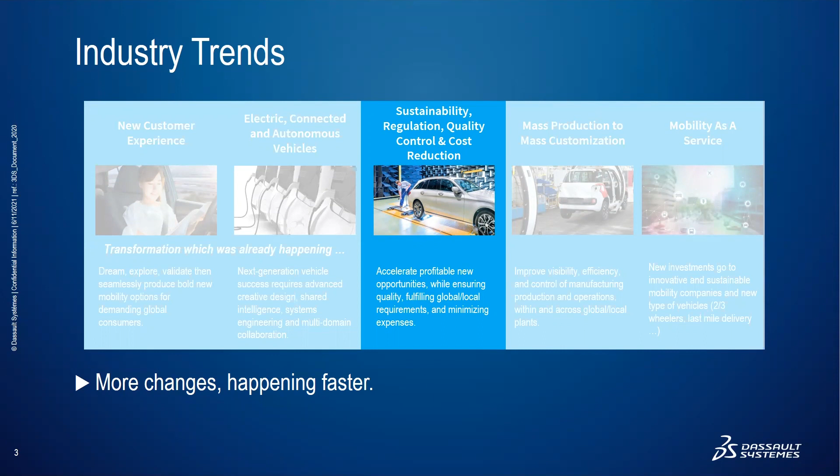It is therefore no surprise that when General Motors, in a press release, shared some of the testing statistics for their 2019 Chevrolet Silverado model, a staggering 7 million miles of testing were required by about 800 test vehicles. Yes, many of those vehicles are production vehicles and therefore less expensive than a prototype. But of course, this also means that they have to wait for the availability of those production vehicles before they can perform the test, at which stage a design change becomes an enormous cost.

All in all, they performed almost 500,000 physical tests. And this is just for one model in their product line.

Now, I would like to put this in context with a quote from Elon Musk, who said, 'Progress in any given technology is simply the number of iterations times the progress between iterations.' In fact, he probably tweeted it.

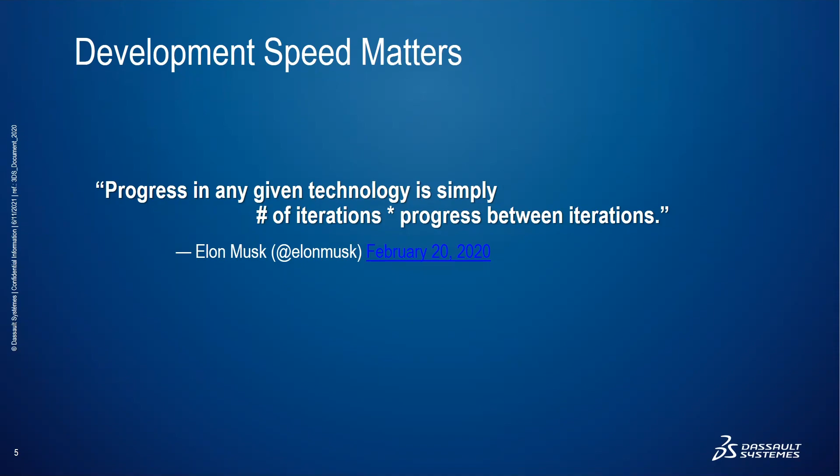I like this quote because it gives us essentially a measure for the innovativeness of an organization. When you want your company to become more innovative, you can, of course, invest in good coffee, beanbags, a ping pong table to improve the motivation and work environment of your engineers, and that will certainly help. I don't discourage that. But ultimately, you have to ask yourself, how fast can I iterate?

So here is an admittedly very simplified flowchart of an innovation process. The key is the loop in the center. The more often you go through it and the more you improve in every iteration, the better your product will be. And this is the reason that GM reports about 500,000 tests for a single model.

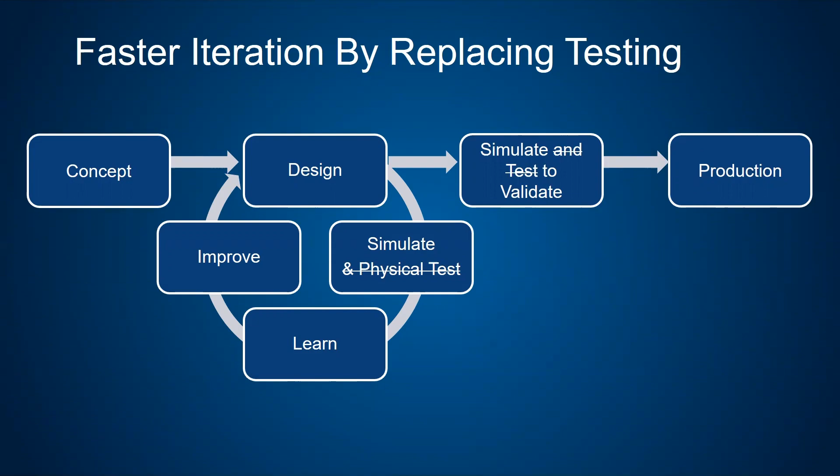It becomes also clear that the bottleneck in this loop are those physical tests. Physical tests are expensive, and there is certainly a high pressure to reduce this cost. But in this presentation, I would like to focus on the fact that they're also very time consuming, and therefore they slow down the innovation process.

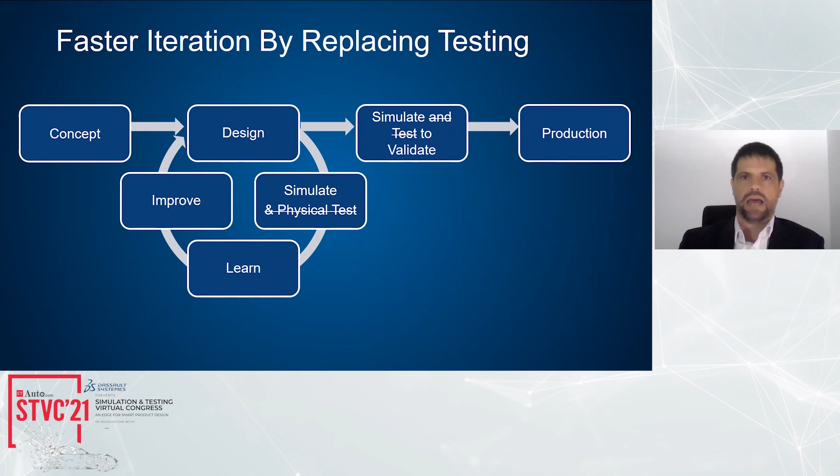It will not surprise you that from Simulia, the answer to this is, well, just replace all physical tests with simulation.

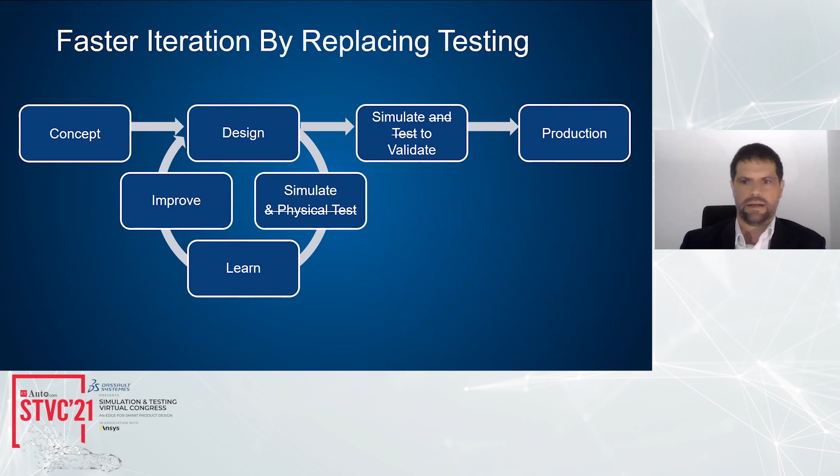When we suggest this to our customers, almost always the first question is, how accurate, how predictive are those simulations? And this is certainly a valid question. If the simulation gives you different answers from the test, obviously you cannot replace one with the other. However, today this is largely under control through a rigorous deployment process with clear KPIs that measure the predictiveness of the simulation.

The next concern is maybe best exemplified by this objection that we heard from one executive a couple of years ago. He said, 'I can build a prototype faster than you can build a simulation model.' Well, if this is true, then by shifting from test to simulation, we are simply replacing one bottleneck with a different bottleneck, and we have very little impact on the speed of our innovation.

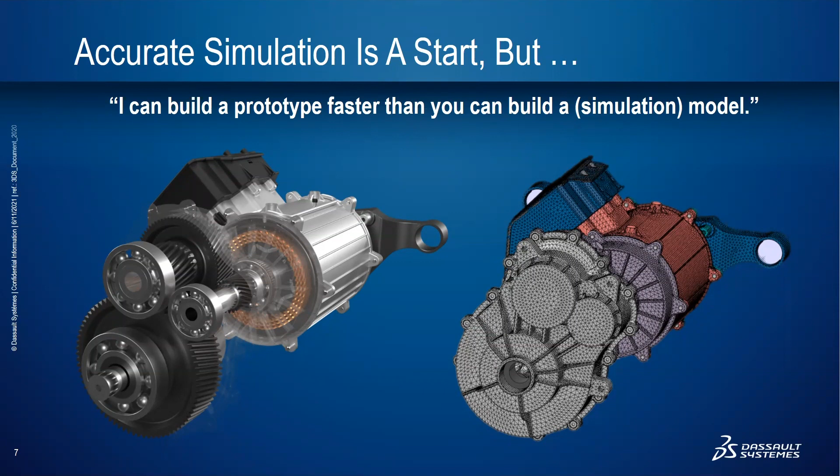This also highlights that within the CAE process, the bottleneck is the model build. This is where ModSim comes in. ModSim fixes that.

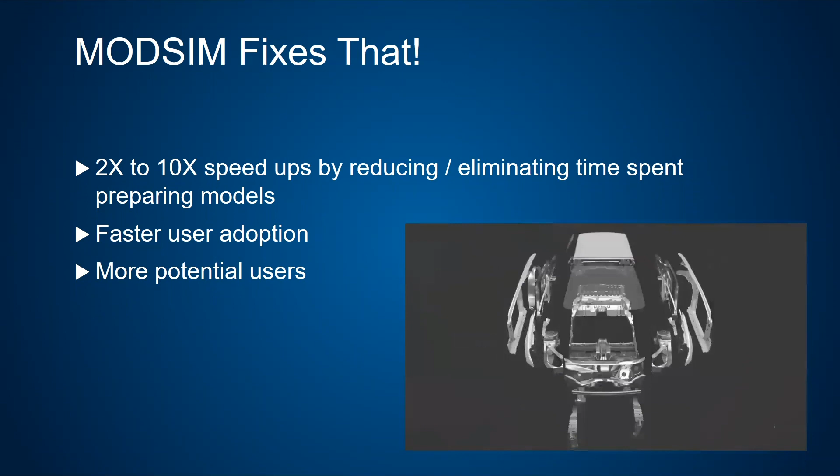Where we have deployed our model build process on the 3D Experience platform, we have measured 2 to 10 times speed up for every single process compared to what was previously deployed.

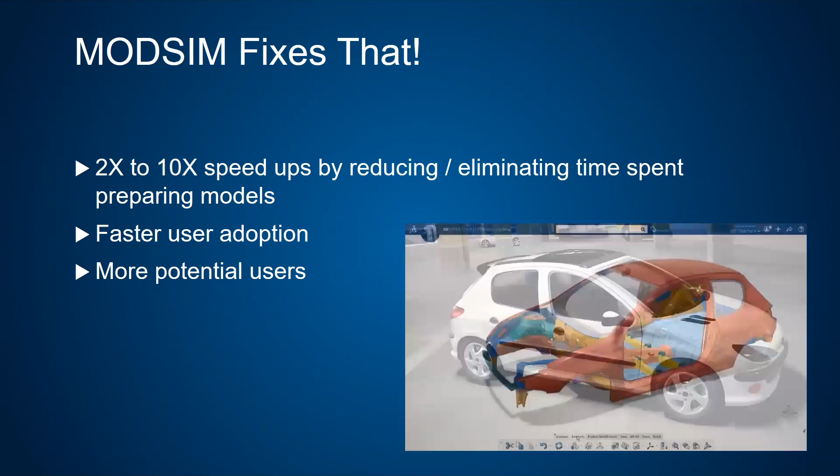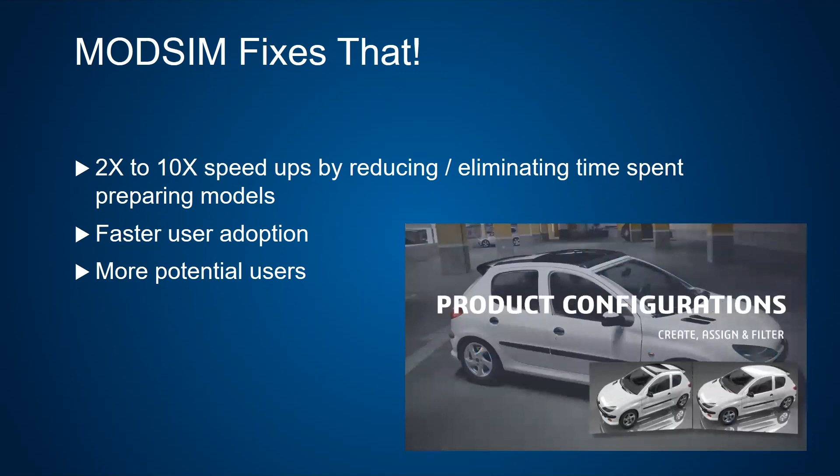In addition to speeding up the iteration cycle, this also had other positive effects on innovation, as it makes simulation more accessible to more users, to designers, which also addresses another concern: what do all these model build experts do that we have today building our models?

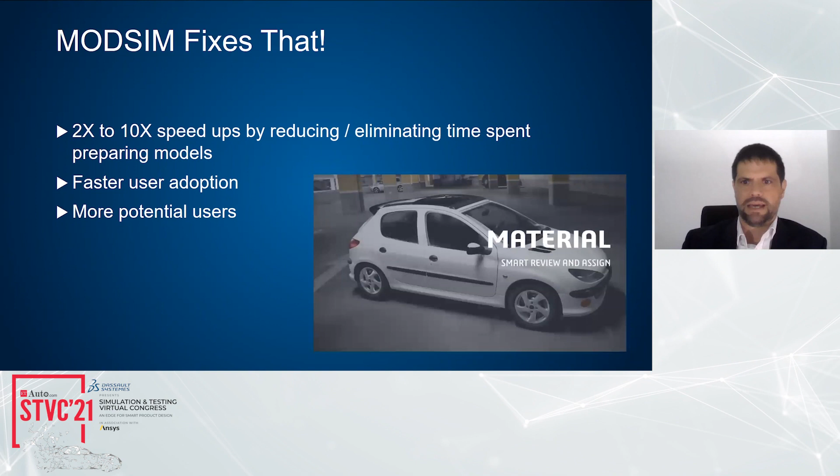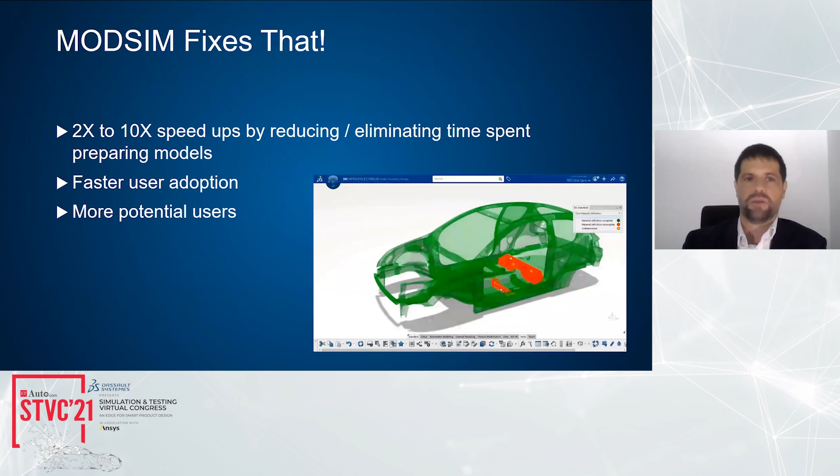What we have seen at companies that have deployed ModSim, that have deployed more efficient modeling processes, is that they have not reduced their workforce, but instead they build more models. It turns out that innovation is more valuable than cost reduction.

So to understand this kind of efficiency gain and how it is possible, let us look at a CAE process, a typical CAE process as it is probably deployed in a similar form at your organization.

So we go from a design on the left, where we have a CAD database managed by a PLM solution and a fastener database, stored on a network drive. In order to prepare a model, the CAD and the fasteners have to be imported into the preprocessor, which does automated CAD mid-surfacing, meshing, some connection definition, largely done by scripting, and then integrates and assembles the whole model. Again, this is stored on a network drive.

Then we have the CAE authoring solution, which sets up the simulation. Normally there are different use cases, maybe for safety, NVH, and durability, and the results are stored on a network drive and loaded into a CAE post-processor. In the meantime, you probably also have an orphan mesh from one of your suppliers, which needs a different process of integrating.

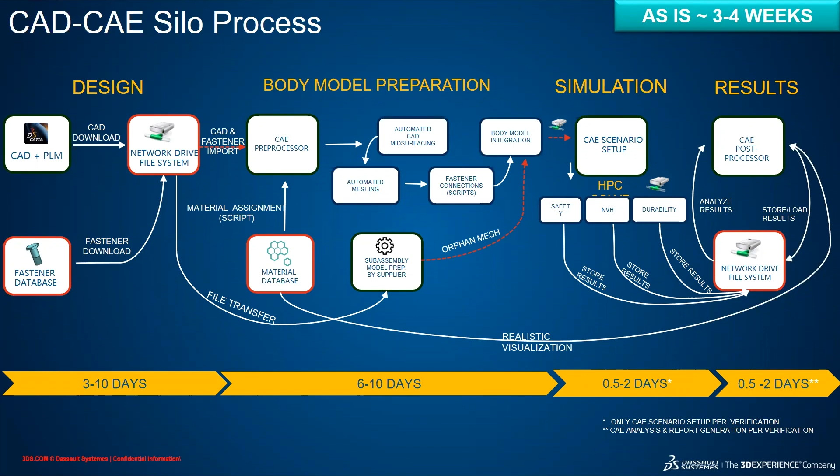And all in all, if we analyze this setup, it depends on the complexity of the model, but 3 to 4 weeks for a vehicle body simulation process is very typical. So what are the problems with this?

First of all, there is the silo between the simulation, the CAE, and the designers. Every time we load a CAD or a fastener database into an authoring tool, we create a copy. This becomes increasingly difficult to manage if we have multiple configurations, which then multiply with the number of use cases that we want to test.

And then we have the issue of complexity for the fastener definition. This is typically where most of the time is spent in the model build process. So all in all, these are the root causes for the length and the time that you spend modeling and creating simulation models.

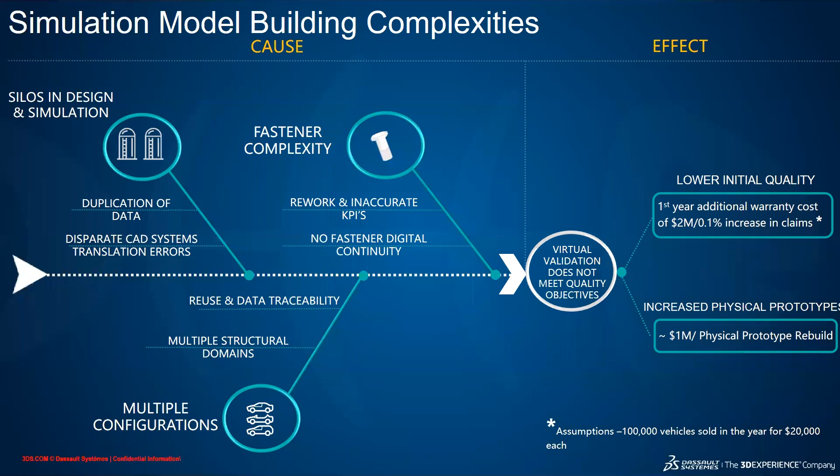We fix this by bringing all of this to a unified modeling and simulation environment. The user experience on the 3D Experience platform is similar to a social network integrated with a business platform. You have communities, notifications, dashboards, projects, and apps. Most importantly, it provides a single database where all engineering data needed throughout the process lives, a single source of truth that eliminates the need for copies or imports and streamlines communication between stakeholders.

CAE model building productivity is the critical path for a successful vehicle launch. This gives you faster management, more automated modeling, and design change synchronization with simulation. So let me show you how this is done in action.

One of the most time-consuming tasks currently is the process of defining fasteners as CAE connections. Here is where we can make use of the fact that the model build engineer can access the definition of fasteners as they are designed in the CAD environment.

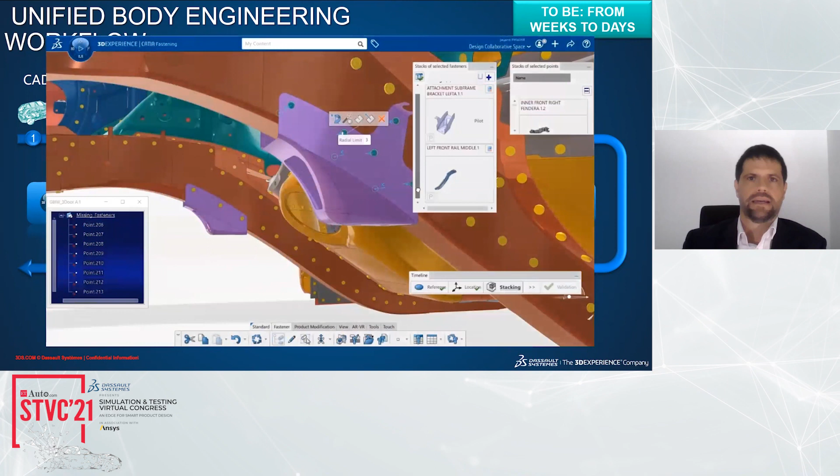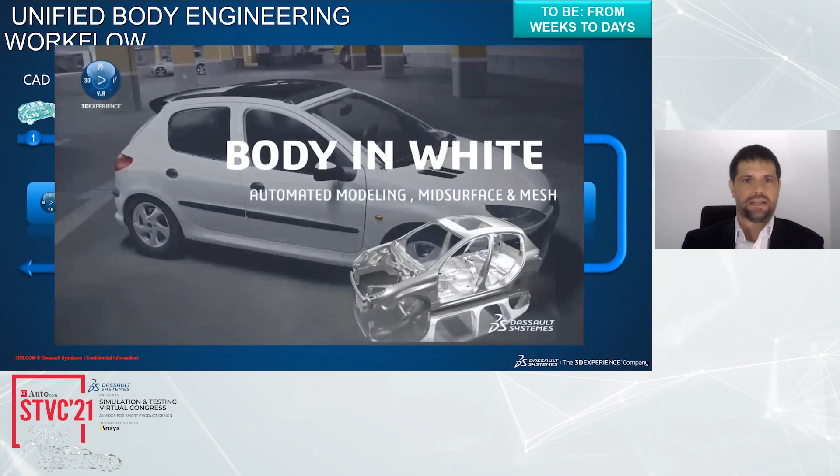Next, we go to the meshing. As we have access to a lot of the CAD attributes, we can make use of advanced defeaturing, mid-surface extraction, and meshing rules and templates that provide an unprecedented level of automation.

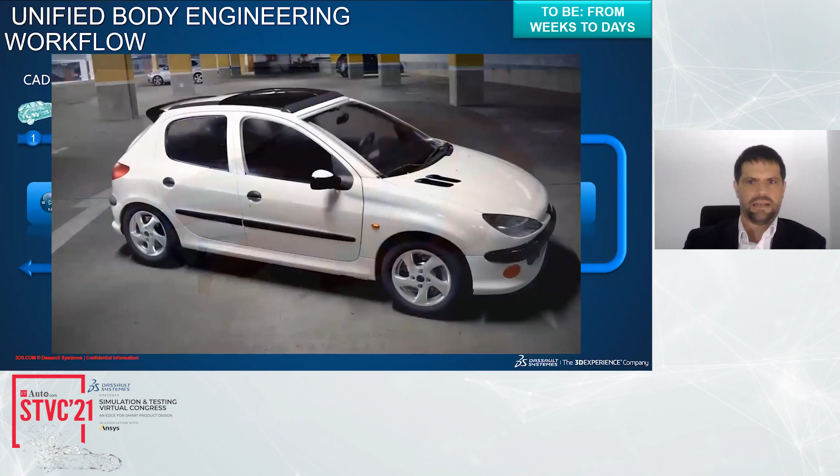Next, the fasteners that have been previously defined in the CAD environment can automatically be converted to a CAE connection. And that cuts short the bulk of the most labor-intensive part of the CAE process.

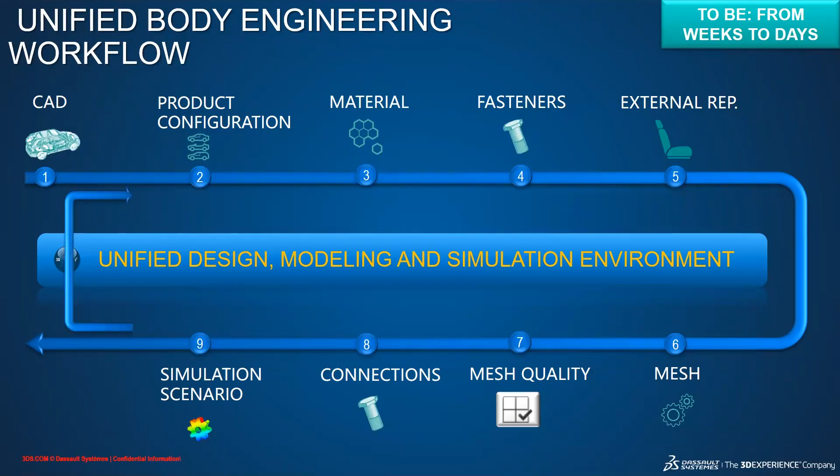The real magic and innovation happens when you go through this loop again. With efficient communication tools, the simulation expert can communicate the required changes back to the design department, leveraging the issue tracking process that they have in place.

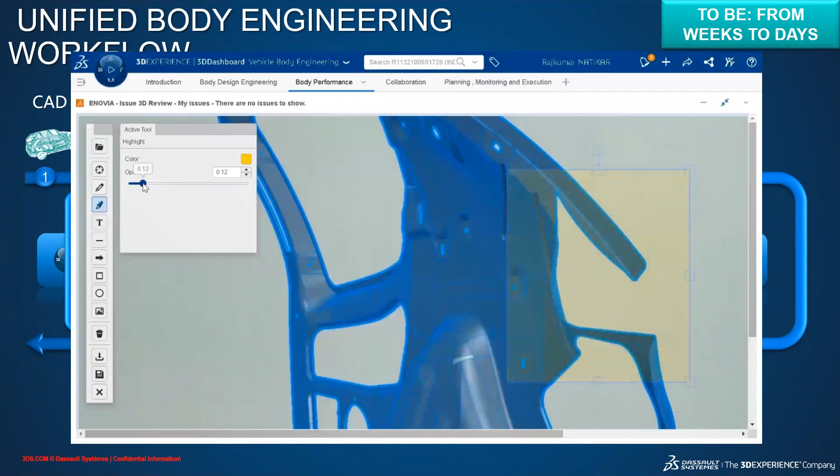After the design engineer makes the suggested change, the whole loop can be rerun with rebuilding the model almost completely automated. This is where we supercharge innovation.

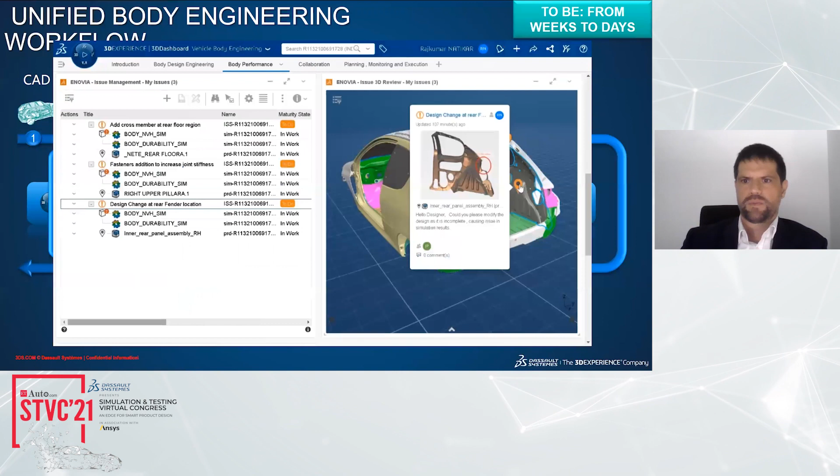But why stop here? Once we have this level of automation, we can bring this to other physics. Here we have our electric drive, noise, and vibration workflow that requires models for electromagnetics, structures, multi-body, and acoustics. If the model build is automated, we can run optimizations and design of experiments across all physics.

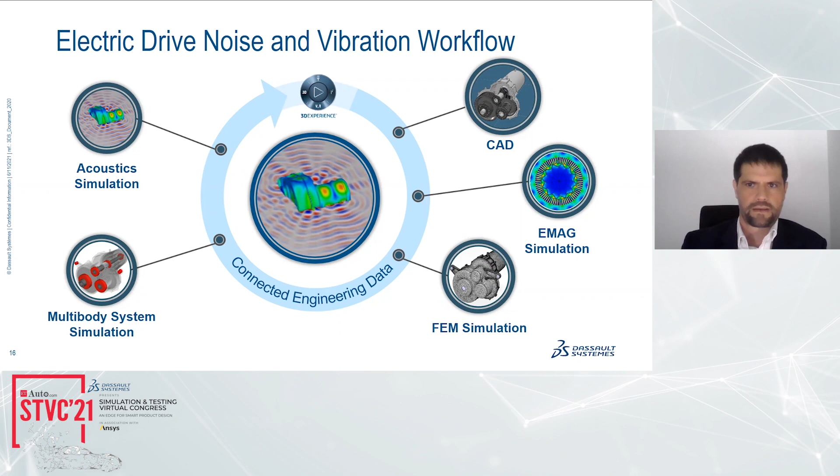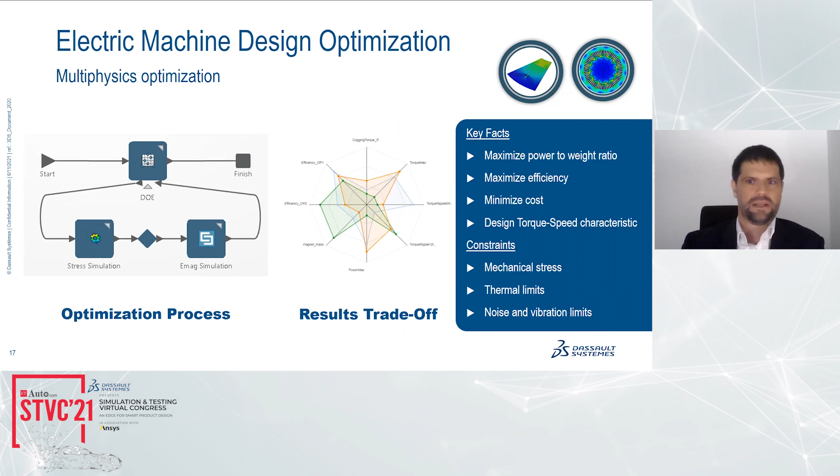This essentially allows us to do trade-off studies that optimize several KPIs, such as power to weight ratio, efficiency, cost, and torque specs, while staying within stress, thermal, and noise limits.

So what is ModSim? ModSim is essentially a way to supercharge innovation by iterating faster, which is helped by a high level of automation between the CAD and the CAE process. Thank you for your attention.